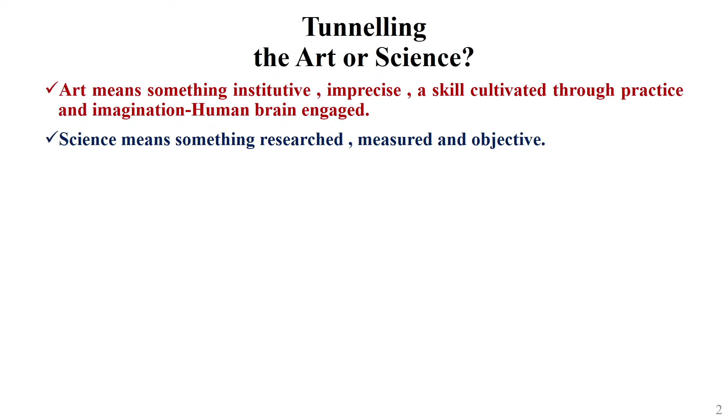Let me clarify why I put it as the art of tunneling. Is it a science or a technology? Art means something intuitive, imprecise, a skill cultivated through practice and the imagination of the human brain engaged in that activity. Science means something we know, researched, measured, and very objective. Obviously, both are poles apart.

Coincidentally, interestingly, the two can make a perfect blend. The art means the things that we are doing in conjunction with science so that tunnels are constructed safely. This was pioneered in rock mechanics by Professor Hoek. The contrast between any other structures and tunnels is entirely different. Tunnels cannot be tested unlike any other structures. They are different in terms of construction material, loads, and safety requirements.

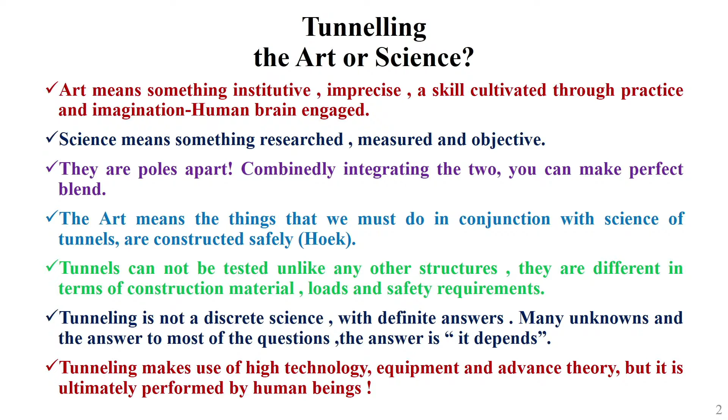For any other structure, we are normally able to verify and test its performance, but tunnels do not have that luxury of being tested. Tunneling is not a discrete science, with definite answers, many unknowns, and the answer to most questions is 'it depends.' Tunneling makes use of high technology, equipment, and advanced theory, but it is ultimately performed by human beings. Thereby, calling it the art of tunneling is fairly in place.

I have very ambitious objectives today. I don't know whether I will be able to deliver it within this one hour, but I'll try to do it. So these are the contents which I will be addressing to begin with.

The lecture is classified into two parts. Part 1 is the fundamentals of design of tunnels, because tunneling is not a usual subject taught in engineering, unless you're graduating in rock mechanics, rock engineering, or underground structures. Maybe one or two electives could be there in the normal engineering program, so there's always a necessity of giving some brief about tunneling. That is what I'll be covering in the first part.

The second thing is the challenging ground conditions. Basically it's case histories, and I picked up a large number of case histories here. I have 40 years of exposure to academics, research, and also professional activity. In the tunneling arena, there are several processes by which tunnels fail - squeezing, rock bursting, water ingress, cavity formation, overbreak, asymmetrical loading, swelling, ground settlement and face loss, portal instability, and impact and blast loads on shallow tunnels.

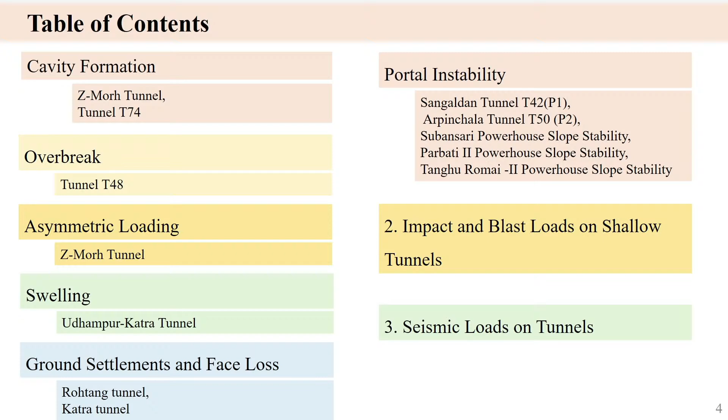Let's see the tunnel design and support systems. Tunnels are basically underground passages for highways, railways, sewage, water supply, public utilities and canals. They have several varieties of shapes and sizes.

Apart from that, you have the egress tunnels. By chance, if you have accidents, you need to rescue, and the rescue can be done through that, and then finally the bottommost is the drainage.

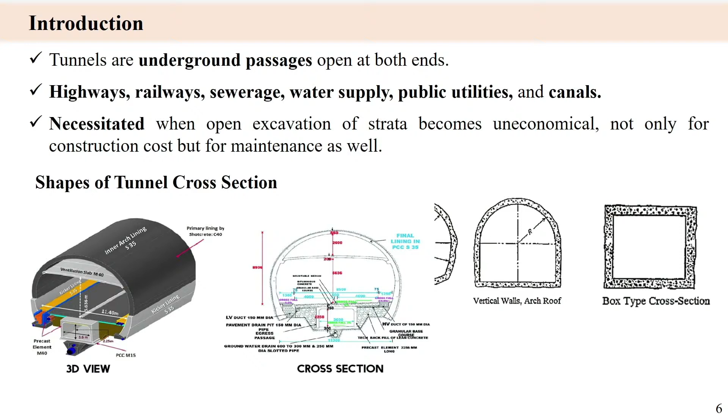Tunnels normally divide into two parts. Both sides will have drainage provided, so the section looks something like that. The collected drainage throughout can be channelized and put into the main drain. Tunnels have different sizes, and the cross sections differ depending upon whether it's a single or double tunnel.

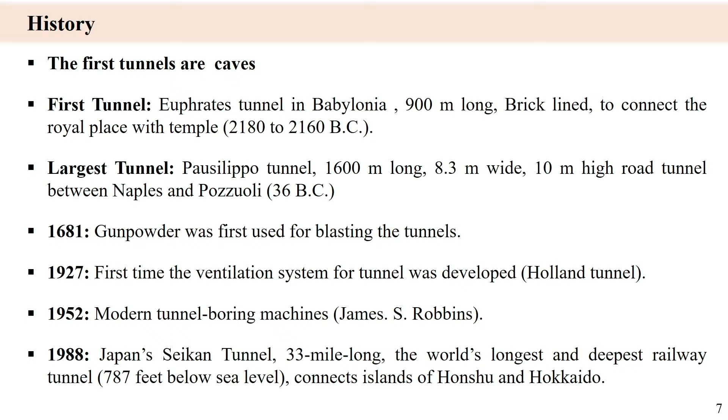If you briefly see the history of tunneling, it's prehistoric, almost like 2180 to 2160 BC - some references are there of tunnels being made, caves connecting caves that automatically become tunnels. The largest tunnel from 36 BC is very remarkable - 1600 meters long, 8.3 meters wide and 10 meters high. It's very big in that sense.

Of course in 1681 you have gunpowder, so subsequently the excavation becomes much easier, and then the Seikan tunnel in 1988 was the largest during that time, and some subsequently.

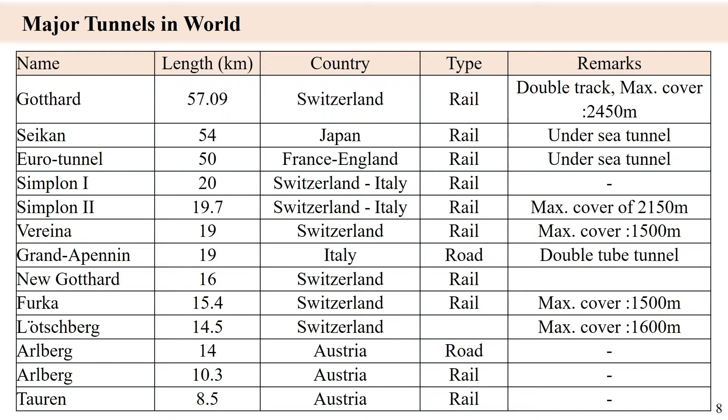There are many tunnels across the world for different purposes, mainly for railways, roadways, or waterways. In India also we have a large number of tunnels coming - as mentioned, the Zojila Tunnel, Pir Panjal Tunnel, Chenani-Nashri, Rohtang - most of these tunnels are in the Himalayas. But across the country there are several tunnels actually coming for the railways. Some of them have been there.

The present scenario of India in the tunneling arena is something like this: 1641 tunnels spreading across 3445 kilometers.

These are in different stages of construction. 77% will be completed and 23% will be under construction.

A total of 280 tunnels, roughly 890 kilometers, will be completed very soon by next year. Another 137 tunnels will be coming up by 2026.

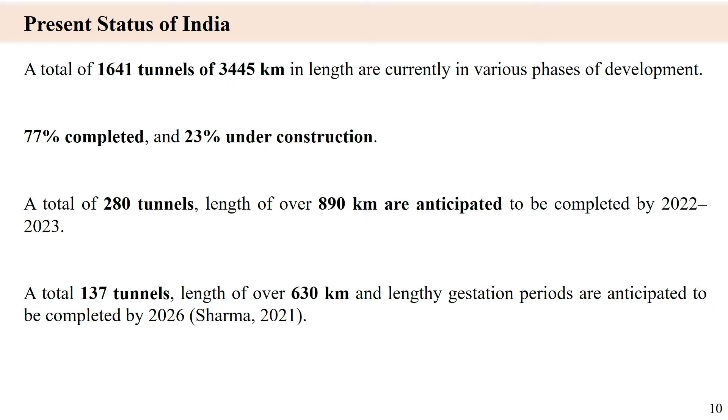So the summary is the design, the tunnel design approach, methodology, and the challenges are different components, which will help in understanding the tunneling practices, especially across the world and across India.

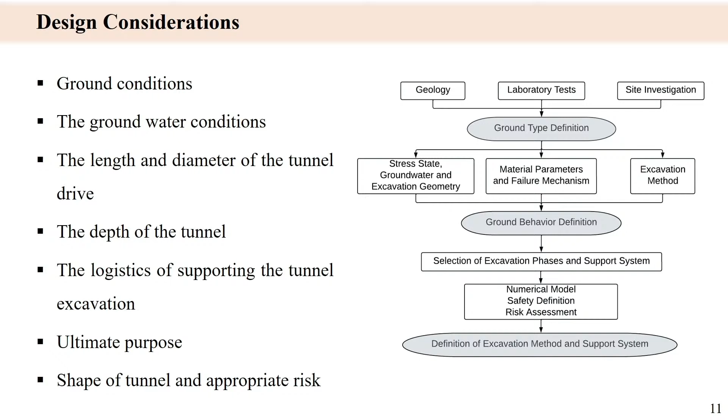As usual, for any groundwork, you need to do extensive investigations. The ground conditions, groundwater plays a very significant role, and the in situ stress state is also very important for underground structures.

We do extensive tests on soils and rocks in the laboratory to get the fundamental properties. Unlike soil, where you can get undisturbed samples...

But for rocks, if fractured from the field, you won't be getting undisturbed samples. That's the major difference and major lacuna in getting the field parameters of the rock mass.

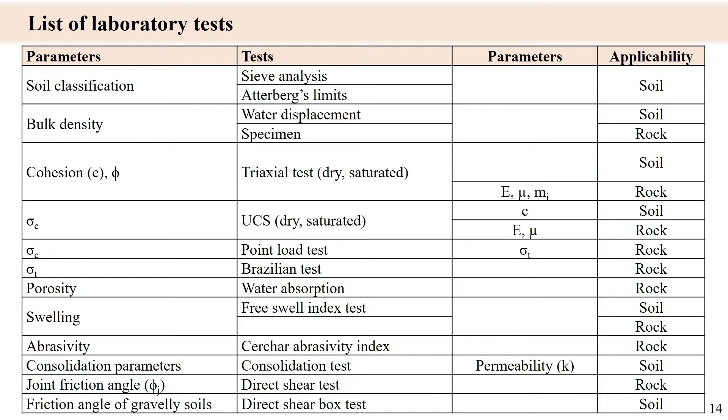Rock mass is the one having intense joints. Depending upon the different degree of jointing, we classify the rock into different classes.

Investigations are carried out pre-construction, during construction, and also while the tunneling process is actually happening, so that we keep doing the investigations.

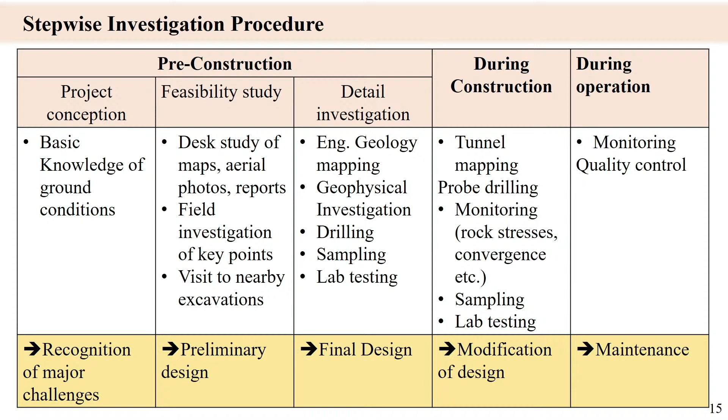Tunneling is the process by which whatever you have excavated, you should verify it, and then make the plan for the next stage.

With all this data available, you will be able to know what is the general gradient of the stress.

But the most important thing is that in soils, we take K naught as 0.3, 0.4 or so, for all our designs. But contrary to that, the rocks are different.

The rock terrain will be having horizontal stresses much larger than the vertical stresses. Thereby the K naught values will be almost going up to 1, 2, 3, 4, 5, 6 in different hilly regions.

Being the Himalayas, the tunneling is actually happening where we expect very high horizontal stresses. So what is that going to do to us when we are doing the tunneling?

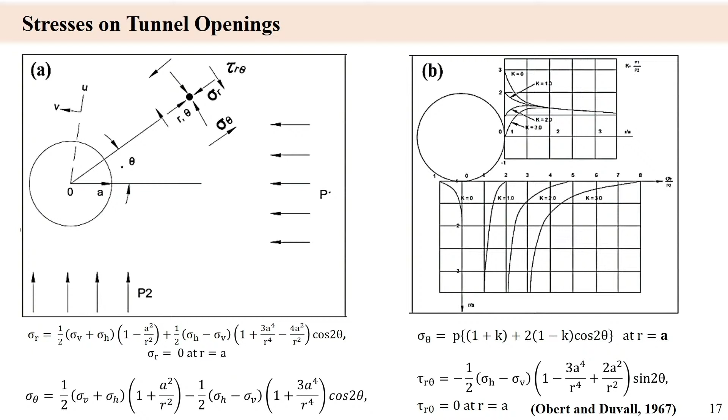Apart from that, these in situ stresses get influenced by the shape as well as the direction of the stress state. We know that in situ stresses, the moment it is a stress, it's having a direction as well as the intensity.

So by seeing the tunnel deformations when they are excavated, we'll probably be able to guess what is the stress state.

Now let us see how you do the tunneling process. You mark the borehole locations, then you charge it, blast it, and then evacuate the muck. This is a cycle. For all these 7 or 8 operations, the amount of cycle time that is actually taken depends upon that, and that decides the progress of the tunnel. If you converge the cycle time smaller and smaller, the project will be completed quickly.

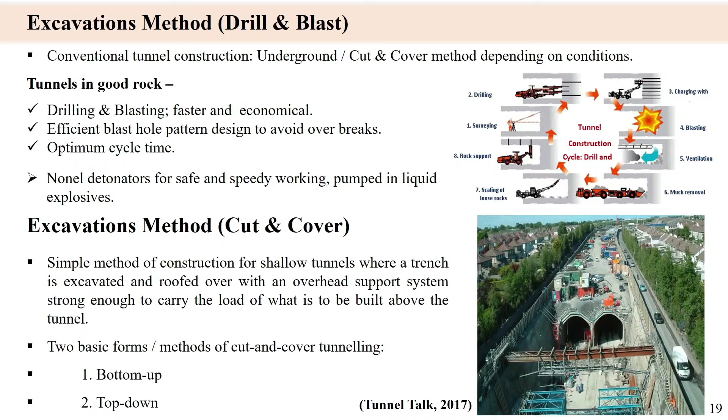So that's at shallow depths. We had about the TBMs, the tunnel boring machines. These are giant machines, having roughly a length of 100 to 150 meters. It's like a factory. Whatever the requirements are there for making the tunnel and stabilizing it, every component of it goes along with that.

So you do have a large cutter, and then if it happens to be soil, obviously the air pressure will be there, so the earth pressure balancing machine is required. Thereby there is a separate chamber in which you have the pressure managing system. Depending upon the site conditions, the cut material will be coming out through the screw conveyor. Whereas if it is a TBM, the TBM has the cutter, with wheels almost 100, 110, at different locations, so thereby in one go you will be getting a very clean cutting.

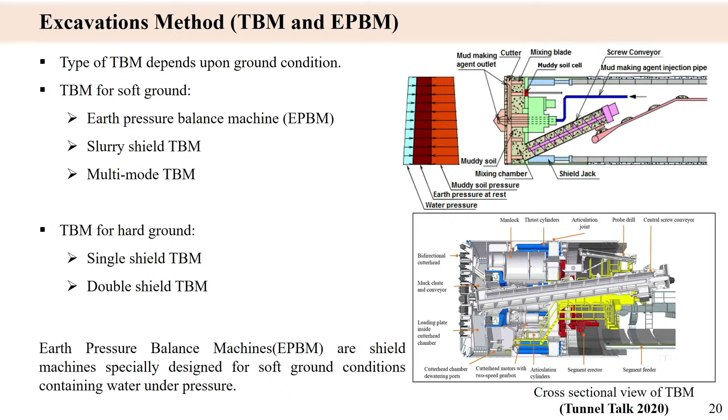So what I want to say is the TBM machines are big machines, and they have very large variations.

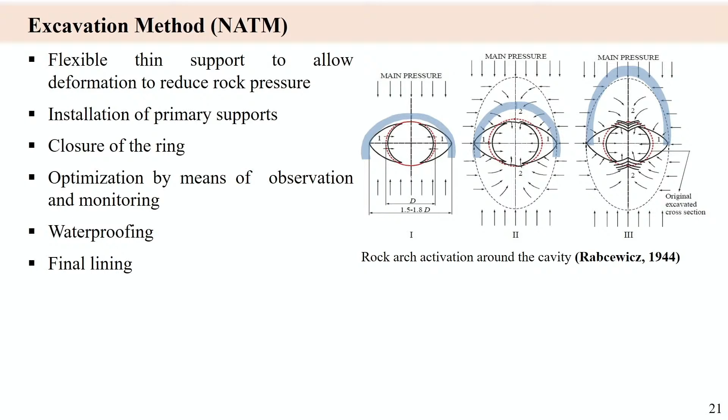Now come to the NATM. Most of the time we keep talking about the NATM. So when you do the tunneling, you just put a flexible nominal support, and then complete the closure, so that the stress distribution will be equally spread. That gives the stability to the tunnel, and then after that you will be doing the rest of the observations, especially the monitoring, which is essential. That is the reason why we say NATM - as you do the measurement, whatever you are getting, based on that you keep changing your strategies.

So in case you are doing the tunneling in very poor rock conditions or soil conditions, what do you do? If you make the full section, if you open the full section, then collapses will be there.

So thereby it is heading and benching. That is the process by which, instead of actually doing the full face excavation, you do it part by part. You excavate and secure the part that has been excavated, then subsequently do the other parts. If good rock conditions are there, you can do the drilling and excavation in one single go, full face. But if you have very yielding type of ground, you go part by part - first for some length, then take the sideways, and after that remove that. It is a very painful, very slow process that we normally do.

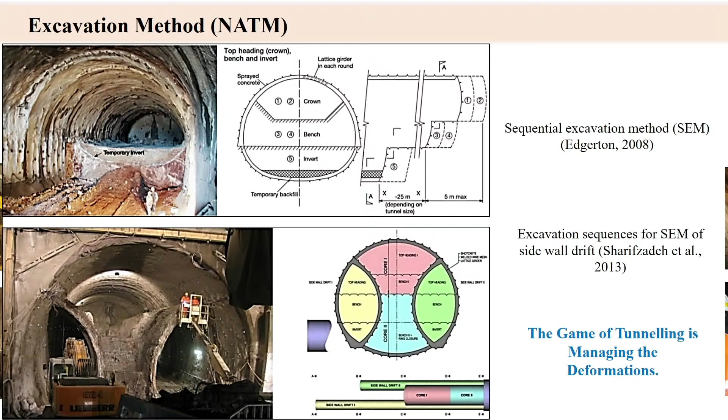So the game of tunneling is managing the deformations. Initially the rock is under equilibrium conditions, but by doing the tunneling you have disturbed it. So you need to find out, when I do this type of operation, what type of deformations am I going to induce into the system, and how do you control it. That is all tunneling is about - controlling the deformations. If the deformations are actually large, then you don't do full face, you do it part by part, so that you are safe.

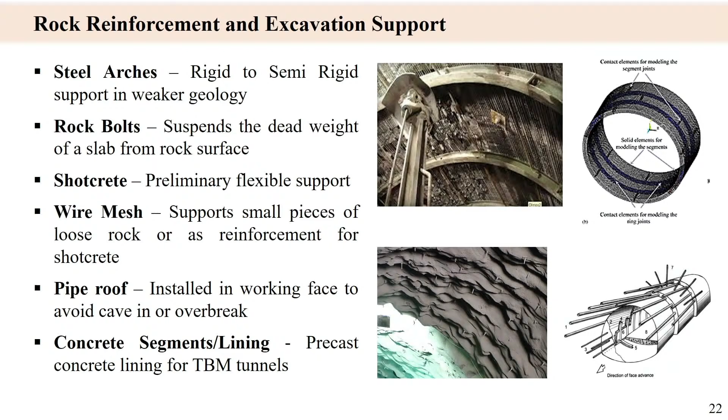Apart from that, when you do the excavation, obviously the stresses will be redistributed, and you will be getting an elastic zone, and the immediate plastic zone should be tied up - that's how we do the bolting. If you have occasional blocks, the jointed rock, you will be doing rock bolts in those locations, and then try to stabilize the immediate blocks from sliding. Once you do that, the rest of the rock mass will be stable.

Sometimes you do get your face itself actually collapsing - the one which you wanted to excavate, that itself is going to fall. So what you do is insert glass fiber reinforced polymer rods to begin with, and then after that you cut the tunnel. Similarly, this is the forepoling technology. Because the roof is collapsing, you create an artificial canopy by inserting pipes roughly 20 meters long, through which you can do the grouting, and then they create a canopy, and under that you will be doing the tunneling.

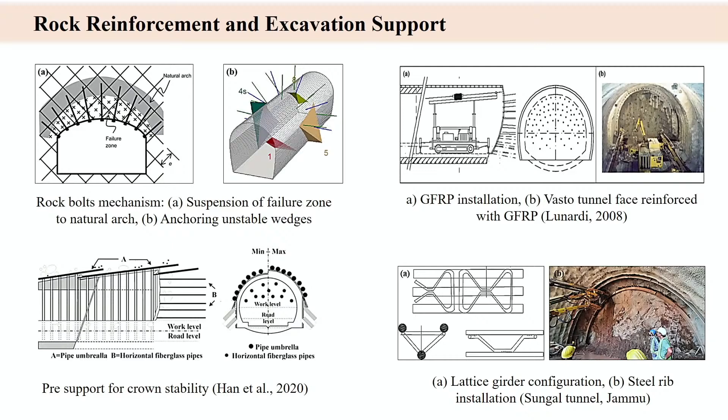And these are the yielding type of support systems, normally we call them lattice girders. If the rock is actually squeezing, you try to create the required flexibility in the support system. We always say that Terzaghi is the father of soil mechanics, but I don't know how many of you know it - he has done very vital contributions in rock mechanics as well.

So they used to get the support through the steel ribs. And he has actually created a theory for what is the total weight which is coming onto this steel support. Based on the different classes, he has given how to calculate it. It's a fantastic thing.

That apart, subsequently the whole rock mechanics classification systems are design methodologies. In soil, we use classification for very limited purposes, but in rock mechanics, classification systems are the main, the primary design methodologies. You can find out what type of excavation you can do, what type of machines you can use, and what is the intensity of the support system required.

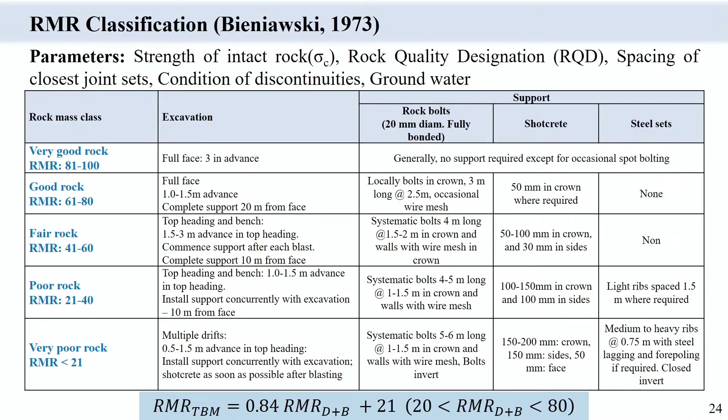Most of these classifications originated in the era of drilling and blast type excavation methodologies. But subsequently, as you have seen, with TBMs, you create less disturbance to the tunnel, so there may be some improvement in the classification rating that you can do.

That's what actually the subsequent RMR TBM is. So if you have a basic RMR and you wanted to use it for TBM excavation, you can do that by that method.

Another classification system came into play around the same time, 1974, by Barton and colleagues. I feel this is very more scientific, the RQD by JN, this decides the block size. The JR by JA is going to give you the internal friction between the block, and then the amount of in situ stress. These are the three things for any failure.

Take a slope, obviously what is the block size, what is the frictional value along the sliding plane, and what is the amount of water pressure that is actually going to be there. I feel that it is a very good scientific way of classifying the rock.

He has, of course, this logarithmic scale, 0 to any value one can use, but most of it, from the good rock condition to the worst rock condition, can be captured within that range.

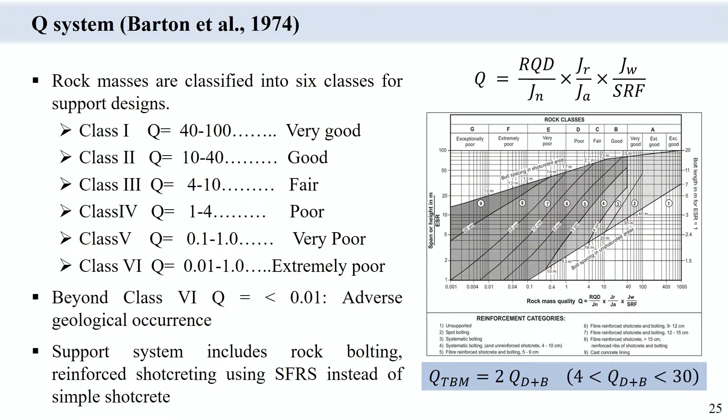This gives, carefully, if you see it, you will be able to design. From the geological data and the geotechnical data, you are going to get the Q value of the rock mass, and then subsequently, for a particular type of tunnel or excavation you are making, what type of support systems you need prior to actually doing the tunneling.

After that, how do you link these classification systems with the rock mass properties? Because rock mass properties are required for the design.

The RMR and other classification systems created the empirical domain, through which you get the parameters. The GSI classification came in very recently and is very simple. If you have basic knowledge of rock structure and the intensity of fracturing that has taken place, the surface conditions, and the structure, these two parameters can be assigned a sum number, which correlates with the Hoek and Brown generally accepted failure criteria.

If you have the intact properties, based on that, and if you know the rock classification number, you will be able to get the material properties. These material properties will be used for the proper design of tunnels, meaning for numerical analysis as well as analytical solutions, if they are available.

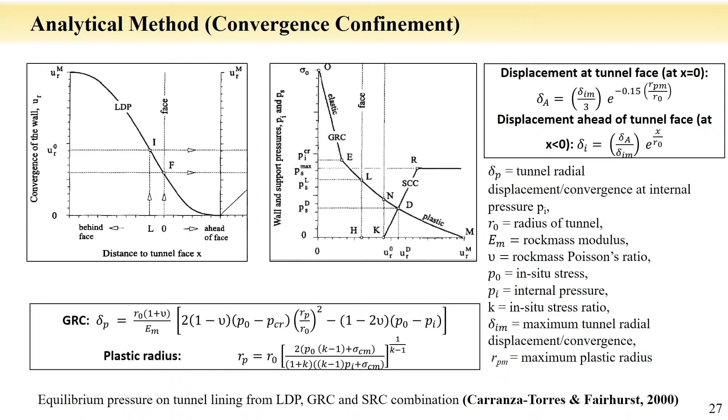So to provide the support system, it will take some time. By the time the yielding takes place, some amount of deformation or displacement of the boundary is definitely required. This line is going to decide when to give support for a particular excavation, and these are different aspects of how the displacements and other aspects will be calculated.

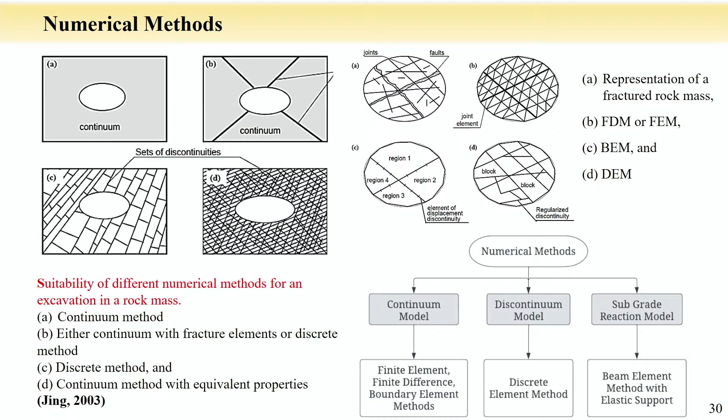We do have a variety of numerical modeling methods available, and they will also be of great use.

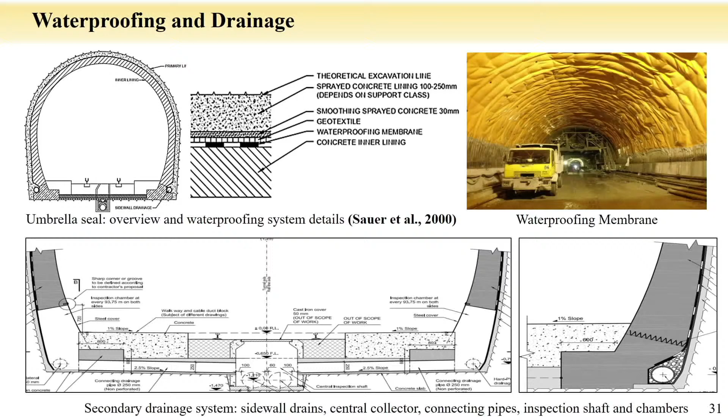If the tunnel has heavy groundwater, you need to channelize it. The tunnels are divided into two categories: drained and undrained. In drained tunnels, you allow the water that is seeping in, capture it, and then put it down in the drain. This means you should have a very effective membrane system which can collect it.

Apart from that, monitoring is really important. As you do the tunneling, you monitor it, keep monitoring it, and keep securing whatever has been done, because the tunnels go in the horizontal direction, cutting across lengthwise. As you go lengthwise, geological conditions will be grossly changing from location to location. So you cannot start with one particular method by which you can do the complete tunneling program.

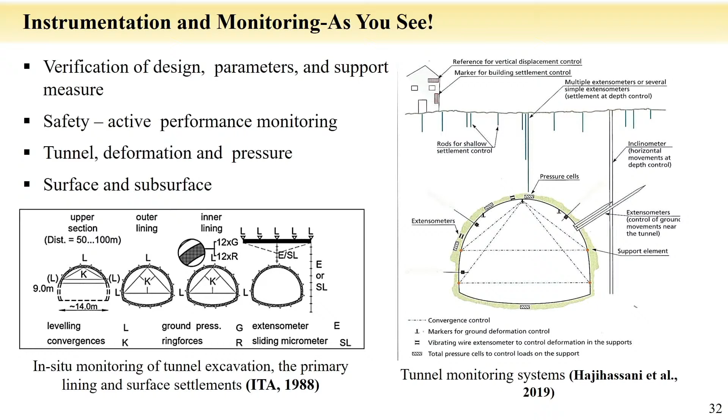It cannot be done that way. So you need to do monitoring - extensometers, pressure cells, stresses, etc. in the lining, and also surface settlements, especially in metro tunnels, since metro tunnels are very shallow. That is also initiated.

The entry points of the tunnel are the portals. The portals are very important, as they have typical slope stability issues, and a variety of failure mechanisms will occur depending upon the joint conditions.

You have toppling, and sliding wedge failures when two joints intersect. What we have is a beautiful method available called kinematic analysis, normally done through stereographic projections. This method allows you to comprehend and visualize very nicely what type of failures are going to occur as you do the engineering.

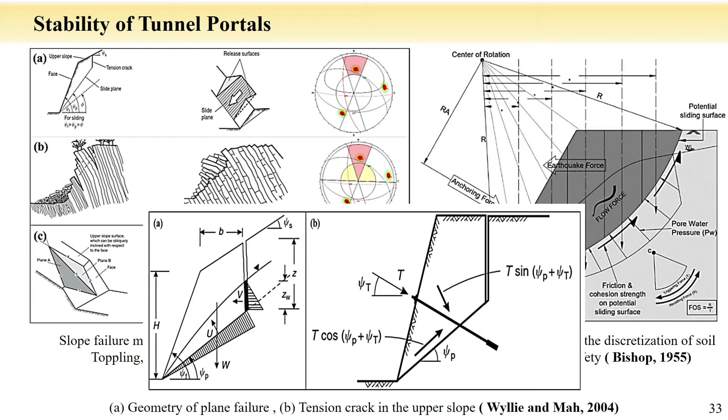Of course, if it is soil, we have typical slope stability methods, maybe the typical Bishop's method that has been given there. Then you have the tension crack, so you have a sliding plane. If you put a bolt, obviously this wedge is going to be secured.

This type of measures we need to do for securing the tunnel portal. This is the tunnel portal. Normally tunneling is done in the mountains, so the mountain face needs to be properly stabilized using a variety of methods which have been shown there. That is my introduction for the tunneling.

Pardon me, I have taken more time for this, but now we will be doing some of the challenging conditions.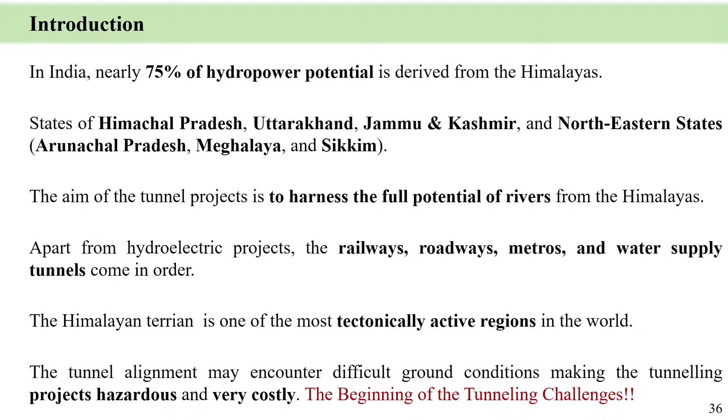Himalayas are unique, with Mount Everest almost 8.8 kilometers high, and tectonically active because these mountains came in through tectonics. If you see the east to west spread, it is large, more than 2,500 kilometers long. That is the spread of the Himalayas.

There is cavity formation, swelling, ground settlements, face collapses. Of course there are limestones, so sinkholes also create problems. Spalling, squeezing, rock burst, and then you do have earthquakes as well as impact loads. These are some of the details about the hydel projects done in the Himalayas.

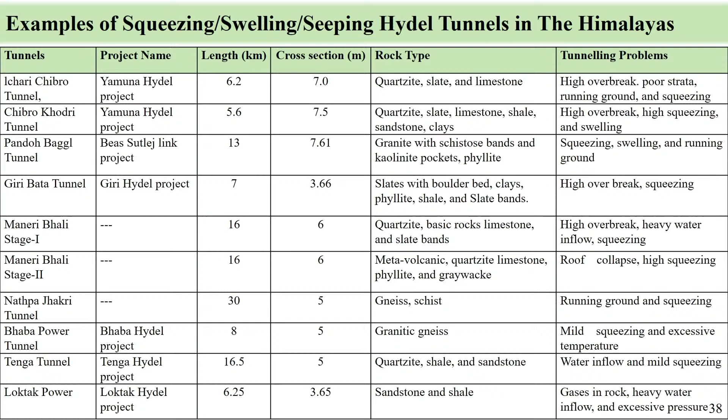And what types of problems you have come across - over breaks, poor strata, squeezing, high over breaks, etc., etc. Even sometimes you do have a lot of gases coming out. A good example of the type of problems which are going to come subsequently.

So there's creeping, shearing, and rock bursting, which is the worst condition. Generally the highly brittle materials, very strong materials, are good for construction, but then the three-dimensional stress state - you are manipulating it, changing it without knowing it. So in one direction, if you remove it in the tunneling direction, you are making that stress zero.

presently as well. So by doing the initial investigations, you will be able to comprehend what type of problems you may be getting into, and thereby you are prepared to...

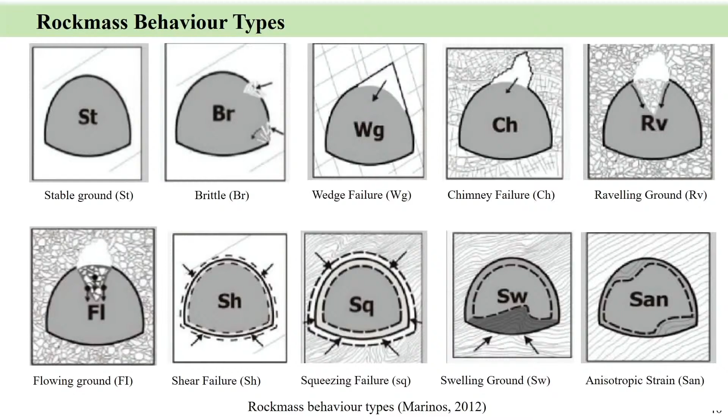So apart from that, a similar type of thing - let me take the first case of it. This is the Rohtang tunnel, a very famous tunnel, the highest tunnel, at 3,000 meters, both the north portal and the south portal at 3,000 plus altitude.

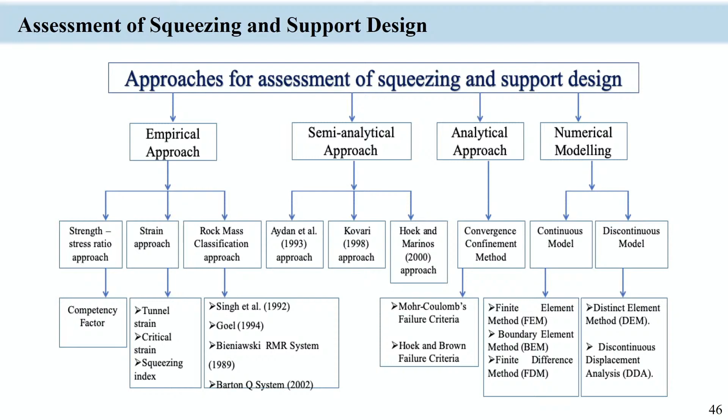In some sections they have issues - squeezing conditions. These squeezing conditions can be handled empirically, semi-analytically, analytically, and numerically, and within that again several attempts are there. What we did is as the tunneling is proceeding, a huge amount of data is coming out.

So face mapping is done, and based on the face mapping you will be able to predict it, of course using classification systems etc., which will keep being revamped as you do the tunneling.

To begin with you do the numerical studies. From the numerical studies it is very clear that some sections are having issues - a plastic zone one can actually predict, and also the major principal stresses, and if you have that type of scenario, that's the type of convergence which is actually taking place.

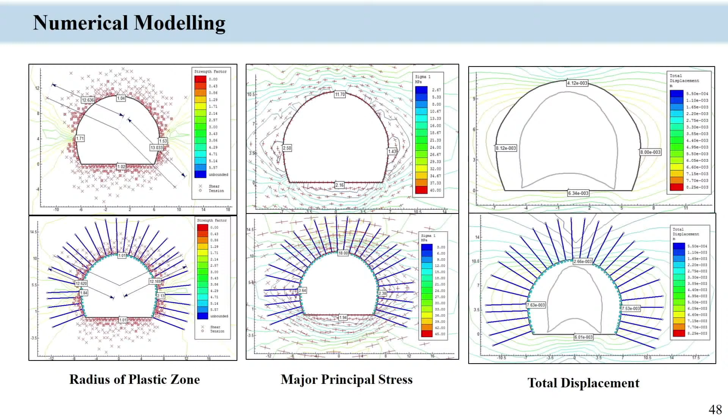To ward that off, you put in the bolting system - that's what actually normally we call the support system.

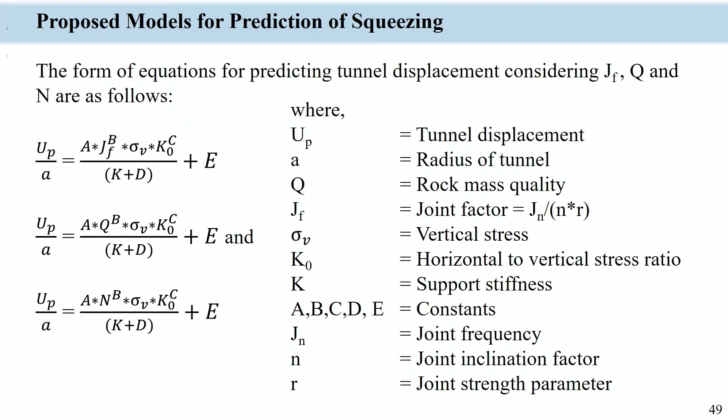At IIT Delhi, we did a lot of investigations on squeezing conditions, and based on that, three varieties of predictive models have been proposed, and they will be compared with the others.

And what are the solutions? The solutions are yielding steel arches, which will be there and get adjusted as the tunnel is getting squeezed. Apart from that, you have lining stress controllers that can be embedded in the lining, and these two methods one can use to control it.

Both these systems are successfully deployed in the Rohtang tunnel. The tunnel is commissioned and providing a great travel experience. I will come back again to this particular tunnel subsequently.

Now let me introduce the great project that is actually happening in India - that is in J&K, connecting the plains to Srinagar and beyond.

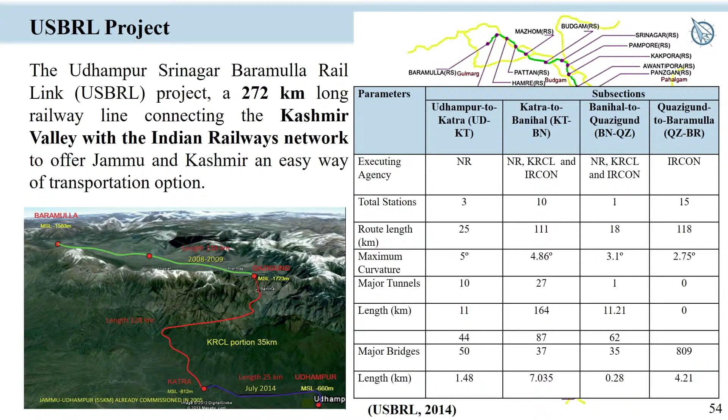This is interesting: the major bridges, more than 900 bridges are actually coming, small and major bridges. The world's highest bridges, the first and second highest, are coming in this particular route.

I take one single project for which I was technical advisor, that is the Pir Panjal, going virtually south to north, cutting across these mountains. These mountains are all season, you have the snow clad, so you cannot actually use normal routes, closure for 6 months. But now of course an all weather tunnel project is actually coming here.

In the center part of it is 1.1 plus kilometers height, and the portals are at very shallow depths. The rock formations are very variable.

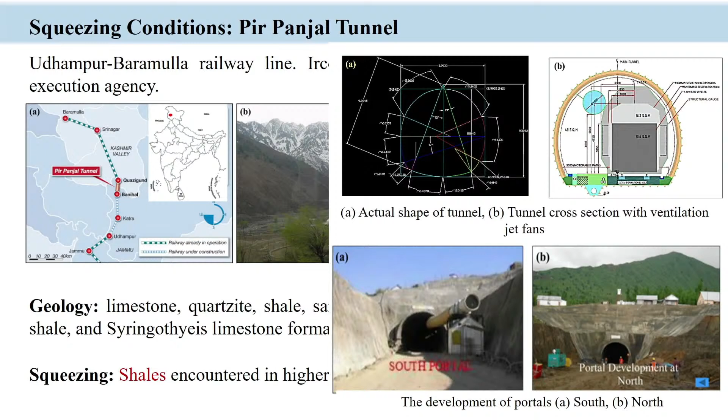These are the two portals, and the equivalent cross section is something like that, and then it is a single railway tunnel with other provisions. You have the primary lining, and then they do have the concrete lining. So this is a railway tunnel.

We did the numerical modeling for all the sections which are actually vulnerable, also using FLAC and similar analysis has been attempted. It is very clear that out of the many sections, the section where you do have the shale of a particular chainage is having an issue.

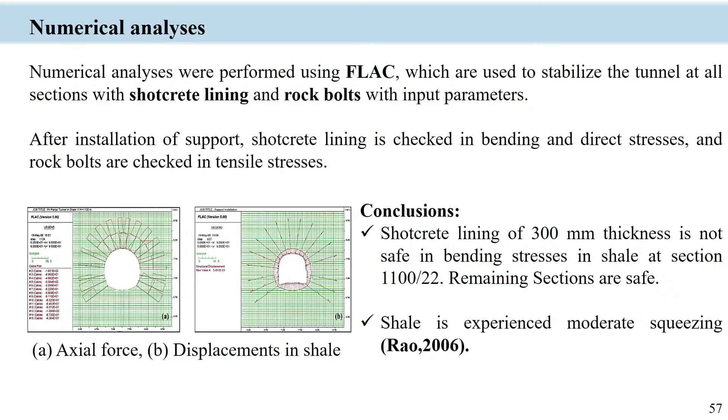So how do you mitigate it? That's what is given here, the different stages of mitigation, and then finally you will be able to complete the project. As I discussed earlier, forepoling techniques, and the shotcrete thicknesses are varied in this particular zone, as well as the yielding.

This is already the tunnel made, because there are so many tunnels in this particular USBRL project, more than 68 tunnels are there, small and big. This is one tunnel which has been actually made, but then subsequently...

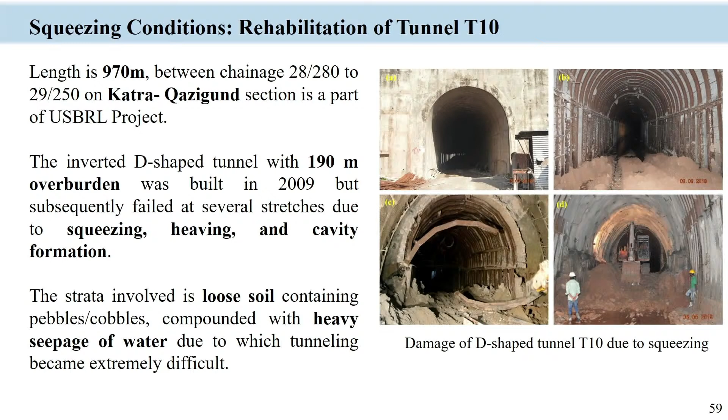The shape is inverted, the D shape, and then the steel lagging and other things are done. But then the tunnel started actually collapsing. So why did this particular tunnel collapse? The shape is not really good for this strata conditions.

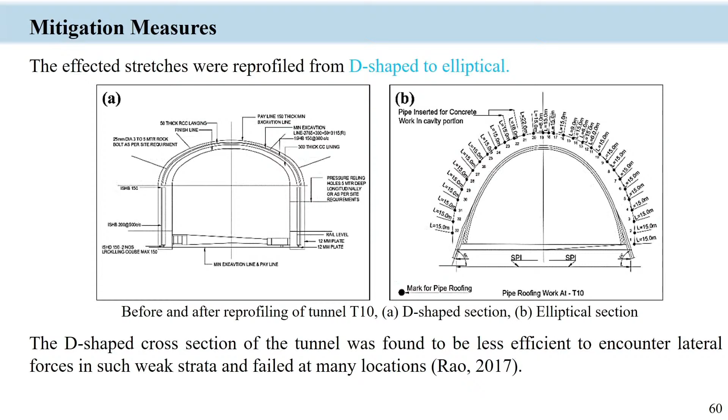So thereby what we did is the reprofiling of the tunnel. Some sort of top oval, connected and completed the bottom invert, and then this is the shape with different support systems which are actually mentioned there. So this gives you the final shape that has been actually done.

So it is perfectly now, the reprofiling of the tunnel T10 is completed, and the tunnel is ready for commissioning. The commissioning was held because of the completion of the two iconic bridges.

That is the Chenab Bridge, which is having a height of 359 meters, 35 meters higher than the Eiffel Tower. The other is the Anji Khad bridge, the second largest bridge which is actually coming. When these two bridges are ready, then you will be...

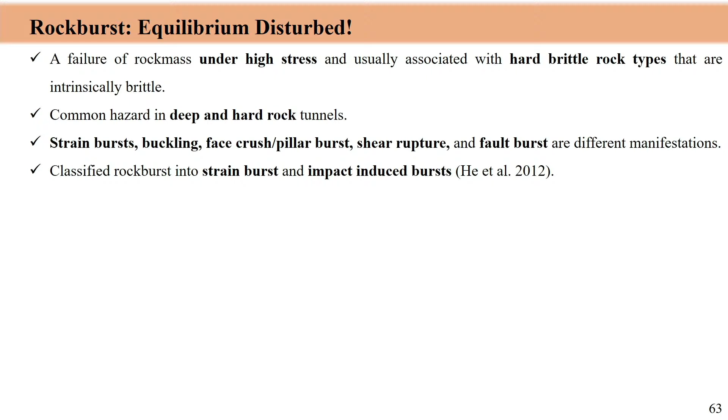The other thing is rock burst. I said that in highly brittle materials, you will have sudden release of stresses in a particular direction, which will be subjected to rock burst. And rock burst can actually happen in several ways.

I take one project under this, that is the Parbati hydro project, power project. The cross section is something like this, where you do have the high strength Manikaran quartzites. As you know, quartzites are the highest, strongest rock types.

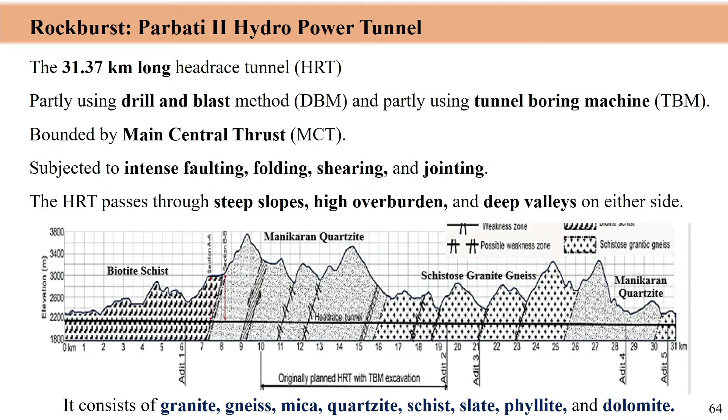You have the quartzite, and then the rest of the length of the tunnel has the phyllite, schist, slates, gneisses, etc. In one segment where the TBM has been actually engaged...

Suddenly, a rock burst occurred. So thereby the TBM got stuck inside, and even now it is still stuck. So it is not yet complete, and I have not put my final statement on that. It is still going on.

When the rock bursting is actually taking place, the rock gives some signals, what we call acoustic emissions. The technology is actually developing, because in underground mines as well as this type of situation, if you monitor it properly, probably you will be able to get, prior to the real collapse, to stop it.

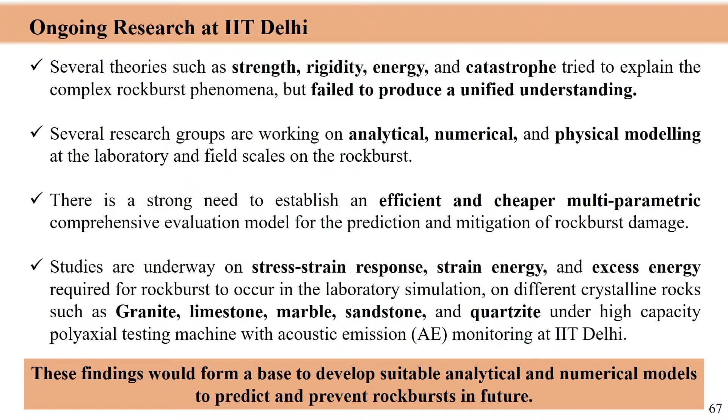That is the attempt which we have been doing, at IIT Delhi, and of course the results are not yet put out on this. So our anticipation is that the findings would form a base to develop suitable analytical and numerical models to predict and prevent the rock burst in the future. So it's a major game changer. Several teams are working on it across the world, and we do too.

Water is everywhere in the Himalayan tunnels. As I said, when the Himalayas were formed, the aquifers actually got entrapped, so they are charged with water. It's mind-boggling, the amount of water that comes from these projects.

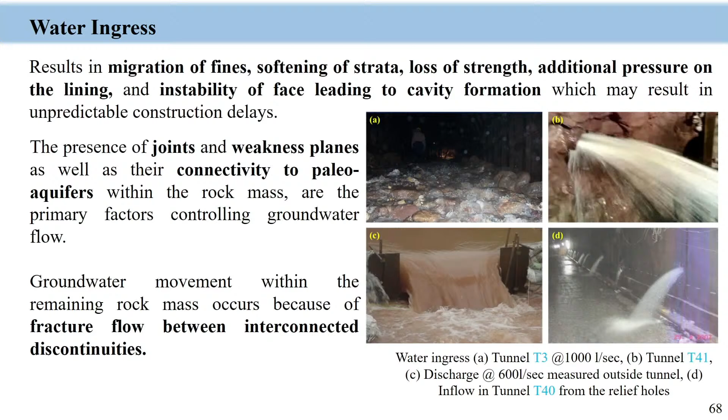The mitigation measures have been listed there. Now let me take this, this is Udhampur Katra. The tunnel number given there is T25, and pipe roofing and surface grouting are the two methods which will work in this. Of course you will be draining the water for some time, and then subsequently you start actually doing the mitigation measures.

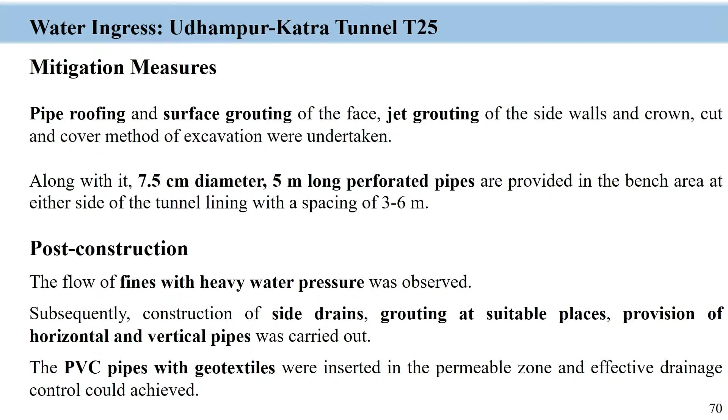This is another project, the tunnel T5. In this, you do have water logging. The actual geological section looks like that, and all the lines indicate that you have a lot of joints. Drilling and blasting is the method that has been actually utilized.

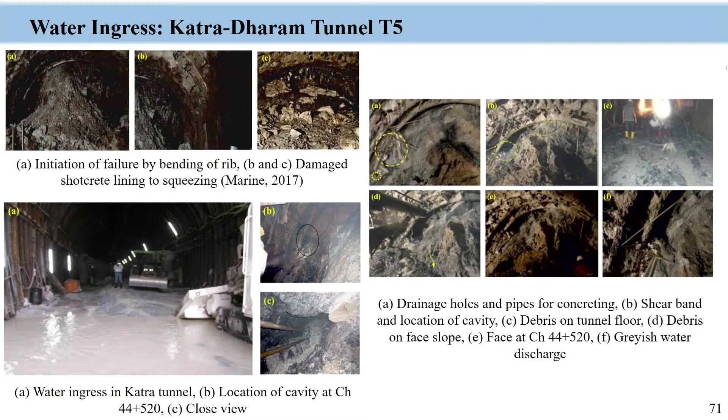Now you see the scene of the workplace. It's treacherous, the project got stuck for many months, because the water kept oozing out. Finally, of course, we could get T5 completed, successfully completed there.

This is very interesting. The Rohtang project is an iconic project. Atal Tunnel is what we recast the name to recently. The interior is the most sophisticated. It's a 9 kilometer road tunnel, with all the modern facilities, and also an escape tunnel that has been made there.

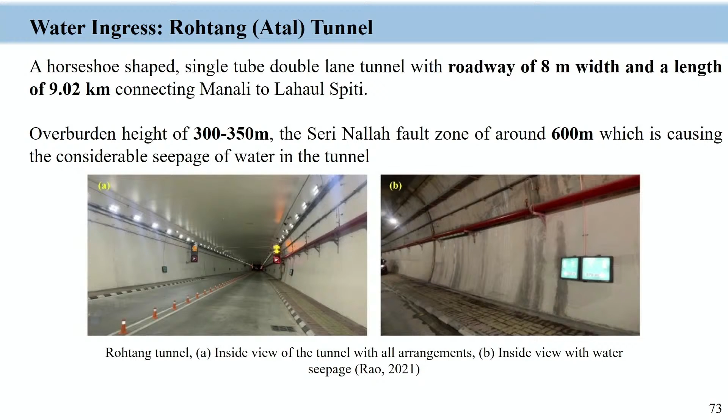But after 3 months, what we found is that one particular section is getting some sort of seepage, which indicates that some amount of leakage is actually coming through. Why is that actually happening? The ministry has formed a committee to look into this issue. This is really what happened. It's not that this problem is unknown—even while the tunnel was being constructed, we had a lot of trouble, and then somehow the project was completed. Now you see that.

This is the Beas river system, and this is one Seri Nala. Seri Nala actually has 4 parts, and one Nala branch is cutting and flowing down. That is the root of the Seri Nala coming from the higher regions, and then the Rohtang tunnel is actually going in this direction.

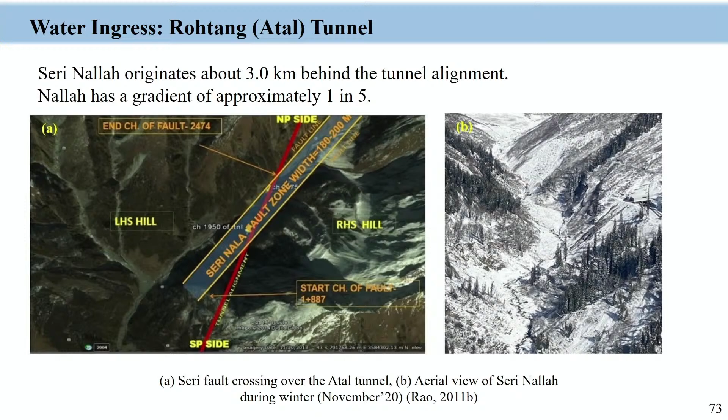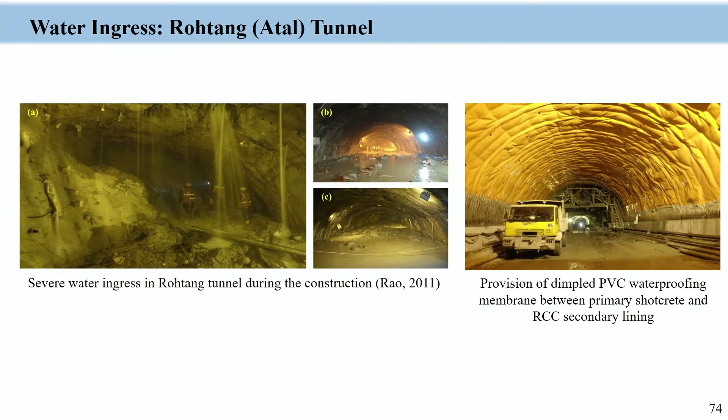Thereby the Government of India was wondering why don't you change the course of the Nala. We have so many hydrological engineers who did wonderful things for hydro potential tapping, so why not change the river course or the tributary course? That's what was actually given as duty to our committee. Of course, Professor Mahendra Singh is also one of the members.

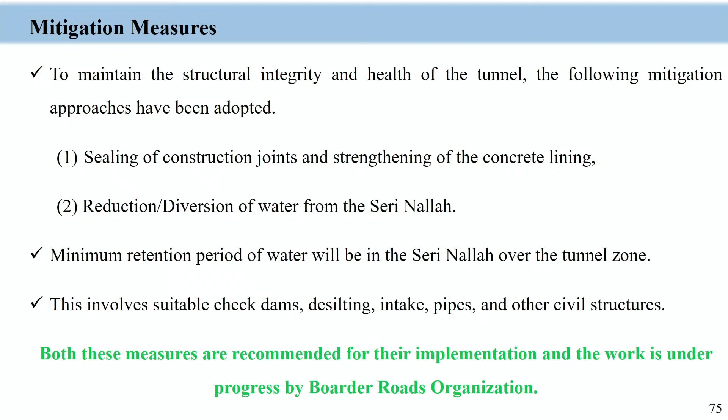Both these measures are recommended for implementation, and works are actually under progress by the BRO. BRO has given the work to the NHPC for the detailed BOQ, and subsequently the work will be continuing. So this is the Z-Morh Tunnel.

Again a water problem. Since we have discussed many water problems, I will say that this particular tunnel's construction is completed, and its inauguration is in the offing.

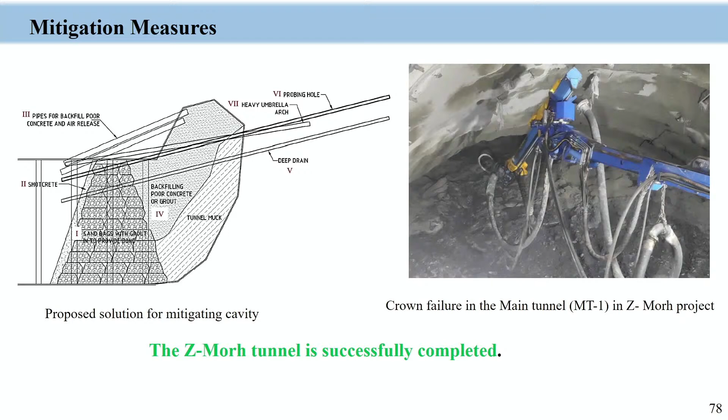Cavity formation is something that happens very often. For that, what we do is - cavity formation means you are drilling at this face, and this side is going to collapse. When it is collapsing, you cannot actually go forward. So you try to pack it up with gunny bags and shotcrete the face. You create a wall type structure, then you put pipelines to grout it so that you are stabilizing the area behind, and once it is actually stable, then you can do the tunneling forward.

So this is another tunnel with a similar type of scenario. This is the Z-Morh Tunnel.

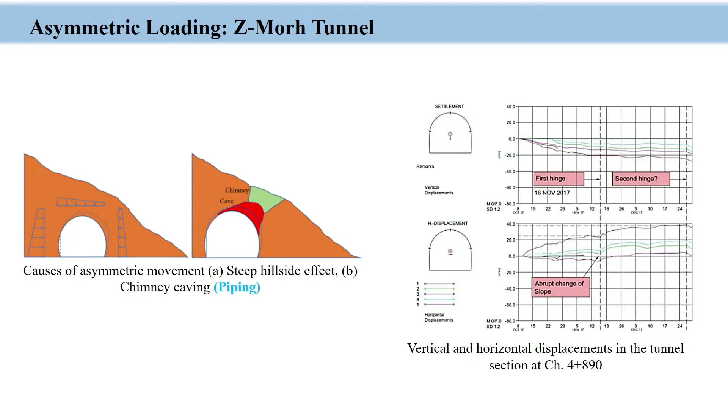This is another interesting problem. The tunnel is very close to the slope. When you have a tunnel very close to the slope, on either side the stress distributions are different, and because of this you will be getting a chimney formation. Once the chimney formation is actually happening, there is no way that you can control the issues. The project is finally completed by the mitigation measures which have been indicated.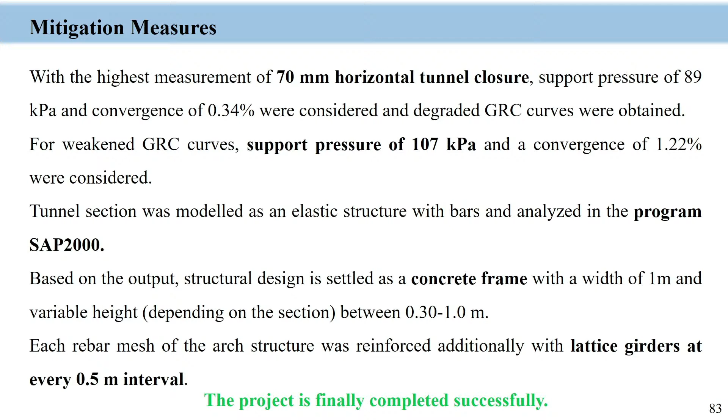Similarly, swelling is a very common problem, because you have shales primarily consisting of montmorillonite and illite smectite clay minerals. In the invert, you will be getting water, and from the invert you will be getting swelling.

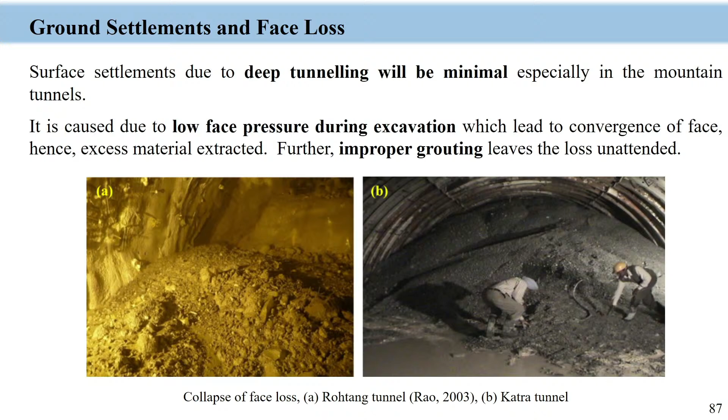These are the mitigation measures. You can see some of the slides where the face is actually collapsing. Controlling such a scenario is an issue. Portal stability is very important, for example for Sangaldan, which is very treacherous.

I will be completing it in another 10 minutes. What is the time that has been actually given? Hopefully I will be able to do it. Nothing to worry.

The portals are very important. If the entry is actually closed, then you are trapped in the tunnels. And recently we have been... okay, so no issue.

So initially we had the collapse, and the collapse was actually under the control of the various international companies. So subsequently, this was actually put to proper shape.

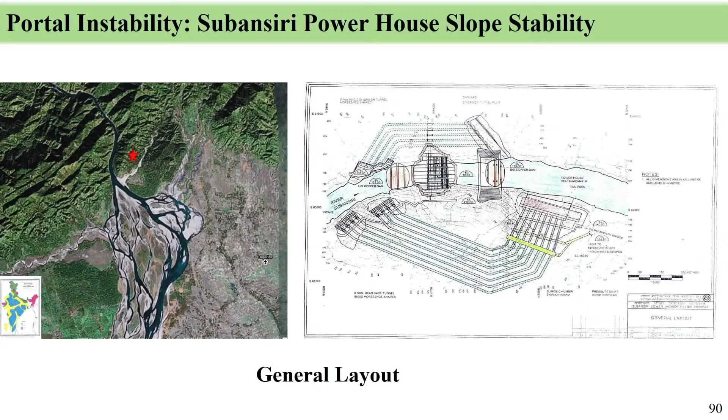This case, the very classical case, Subansiri, 2000 megawatt powerhouse. After the construction, the 160 meter height slope was all done. But then it collapsed. So this was recasted, redesigned, and reconstructed.

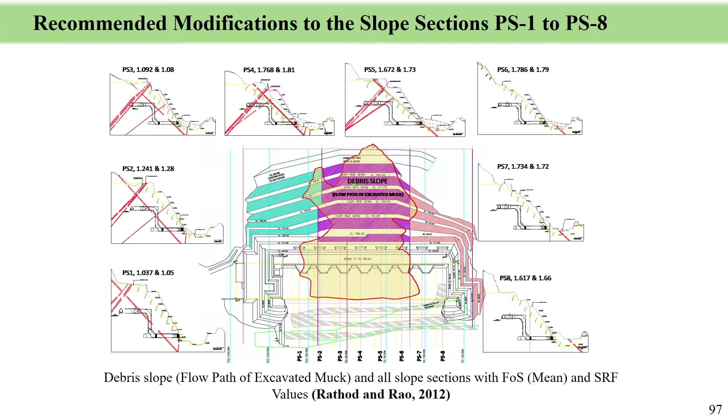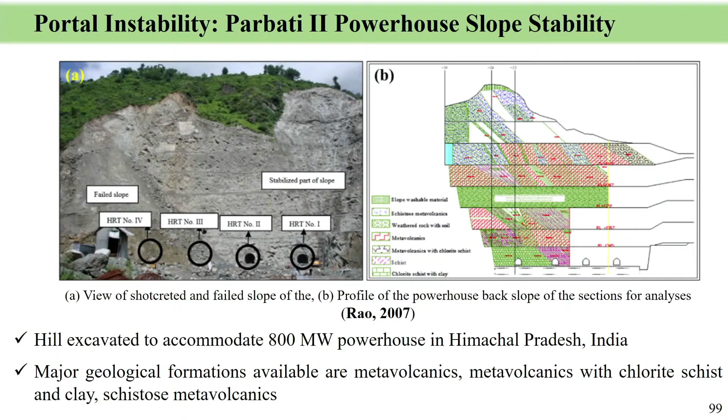The project is actually waiting, because the waiting is because of some other reasons, but otherwise it is fine. Similarly, the Parbati II project is also stabilized, so it is also waiting.

Important thing is the blast and impact. When we say that the future is underground, I keep always telling my students that the future is underground, because we will be constructing and doing all variety of projects underground. What if they are attacked?

There are missiles which can actually penetrate. If you see the Indian terrorist attack scenarios, it is terrible. Enjoy the pictures - this type of things, that can happen.

In a city environment where the tunnels are actually less than 10 to 15 meters depth, the collateral damages will be high. But being in an academic area, I won't be able to do the blast studies.

But the blast studies can be conducted through numerical modeling. However, to get the vetting of these numerical methods, you need direct measurements, scale down modeling, so that you can do it through the impact machine.

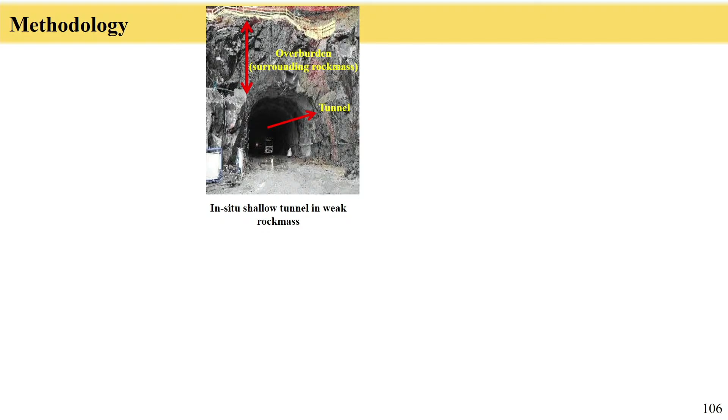That's the reason why we designed the impact machine. That is the models - tunnel models, lined, unlined, in different variety of materials. And this is for the initial characterization.

And then subsequently, you make these models. These models will be subjected to the loading. So that is the machine that has been actually designed.

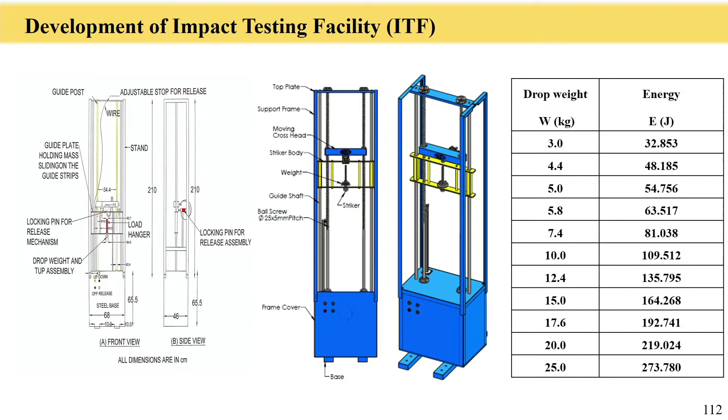Because after all, the impact is energy. Even in the blast also, it's energy. So both can be equated.

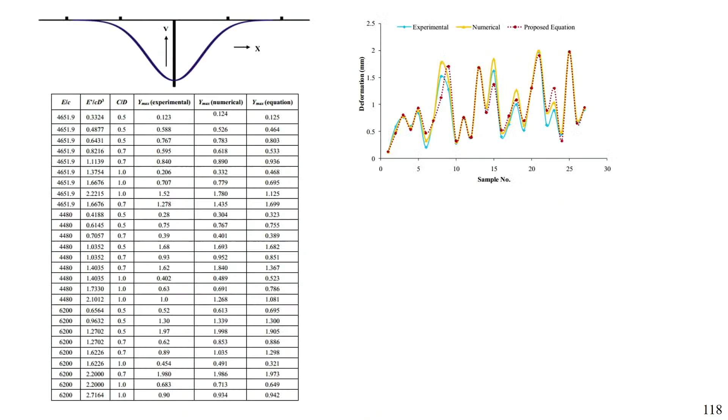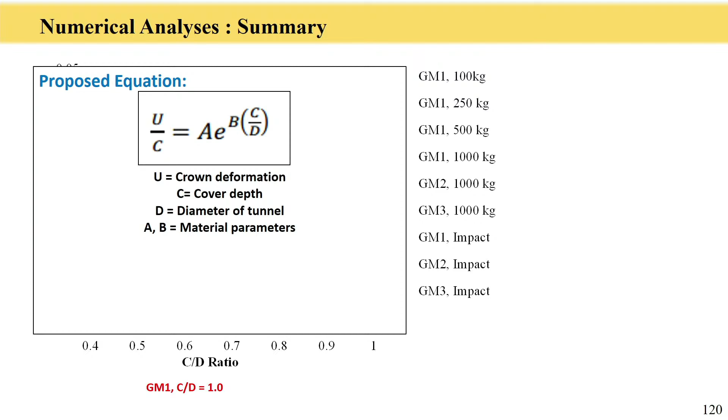And then we could make, through the prototype, a relation between the impact and the blast. So thereby the blast loads - there can be the damages of the tunnels under the blast loads - they can be comprehended.

The future research is going on with intersecting tunnels, the twin tunnels, intersections, varying from 0 degrees to 90 degrees. These studies are actually underway presently.

The last one is the seismic. People said that underground structures have no issue for the earthquake, but we are doing it for the high earthquake magnitude regions, the Himalayas. Thereby issues are there, across the Chichi earthquake and other earthquakes, say from Japan.

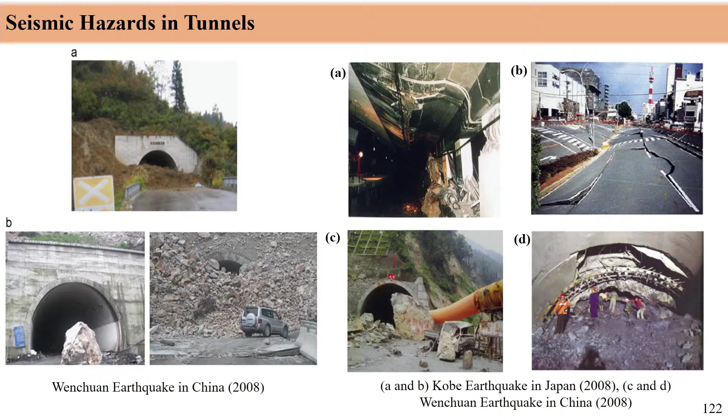It is very clear that portals are important. If that is given up, then there's an issue. Then inside also, your lining is the backbone for the tunnel. If the lining is disturbed, the tunnel is as good as useless. So what I mean to say is that under severe earthquake conditions, issues are there.

So we have initiated, from 2000 onwards, seismic microzonation of different areas of India, and the basic seismic microzonation maps are being used for predicting the USBRL tunnel projects.

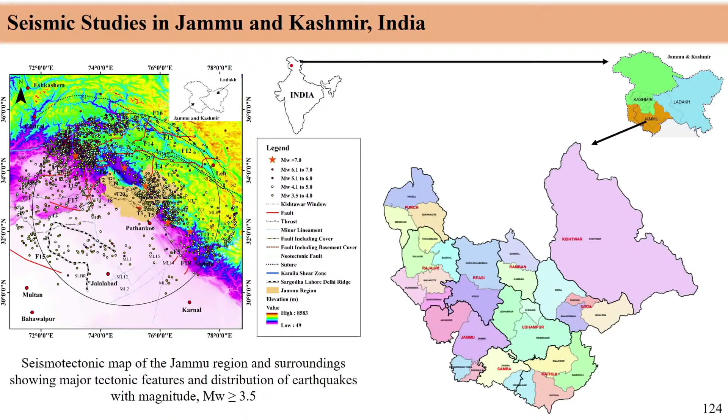So what if a high magnitude earthquake strikes these different tunnels? Can we create and visualize a damage scenario from a futuristic point of view? That's what we are presently working on very hard, and we wanted to create a system by which you will be able to know what type of damages could be possible in a given earthquake condition.

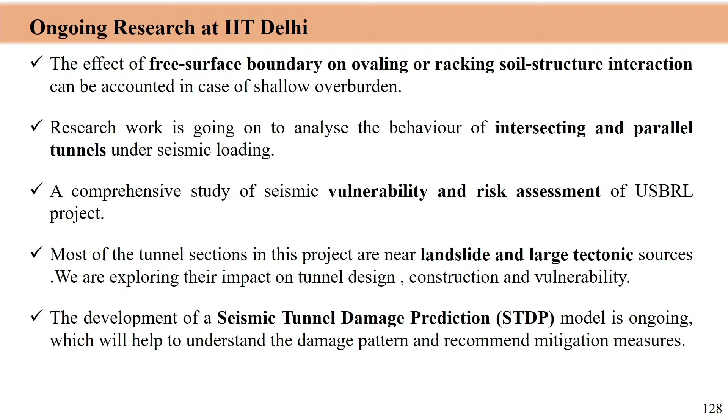So the fragility curves which we are developing are based on the seismic data, and we are developing that particular model.

Luckily, to save time, I have not actually made any conclusions here, because the conclusions are very clear and obvious. I don't want to reinstate them again.

The conclusion, I take it, since this is an occasion to remember Terzaghi's contributions, is very apt in the sense that soil or rock is different, and that is reflecting in all our tunnel projects. This is from around 1946. But then you see the greatness of this man.

What did he say? He said, this is 1452 to 1519, the great man, Leonardo da Vinci. He says, 'I have discovered methods of tunnels and engulfed secret ways which are excavated without any noise in order to reach predetermined locations, even if they have to be dug under ditches or rivers.' What a man, more than 500 years back, predicted that he knew how to do tunneling without any noise, in whichever direction, under any type of terrain.